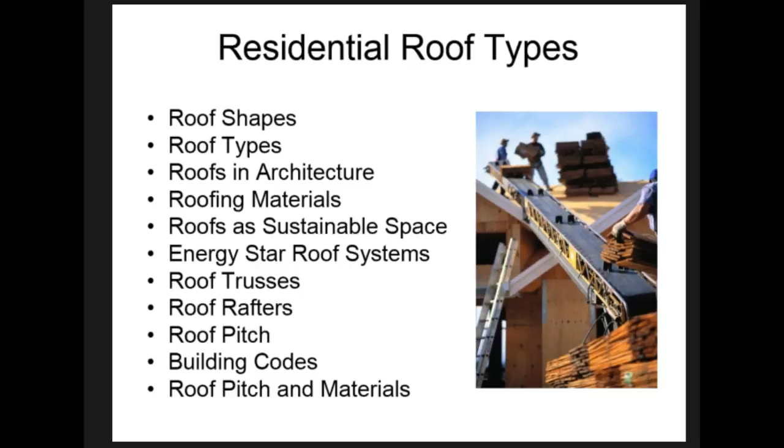We have different shapes of roofs, but basically the roofs do what you know roofs do. They protect you from the elements, and then we make them interesting so that they add visual appeal. When we look at the different shapes, when you have a real steep roof, that's usually in areas where there's a lot of snow because we want the snow to roll off of it. Flatter roofs are usually found in areas that don't have as much snow, and we want to make sure that we do have enough slope on roofs so that the snow or even the rain does come off and doesn't puddle and cause sagging in our roofs.

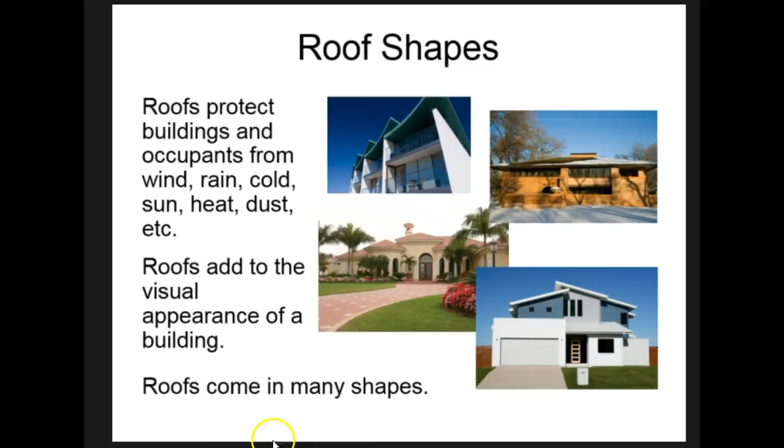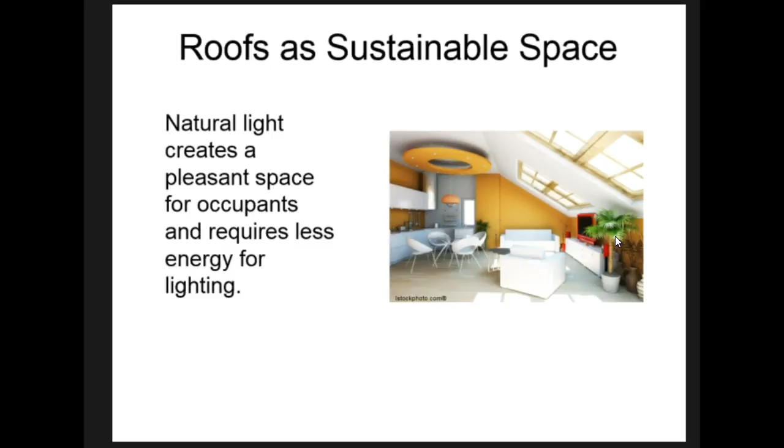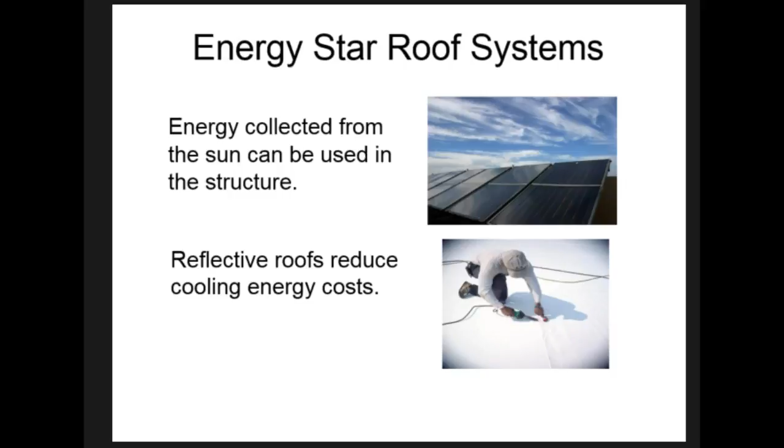Energy Star roof systems. We will talk a lot this year about Energy Star and saving energy and reducing energy cost. It's a very big concern for the world and civil engineers in particular. On our last video about the framing system, we talked about trusses. This is what a roof truss would look like from the side, and that's what it looks like when it's being built.

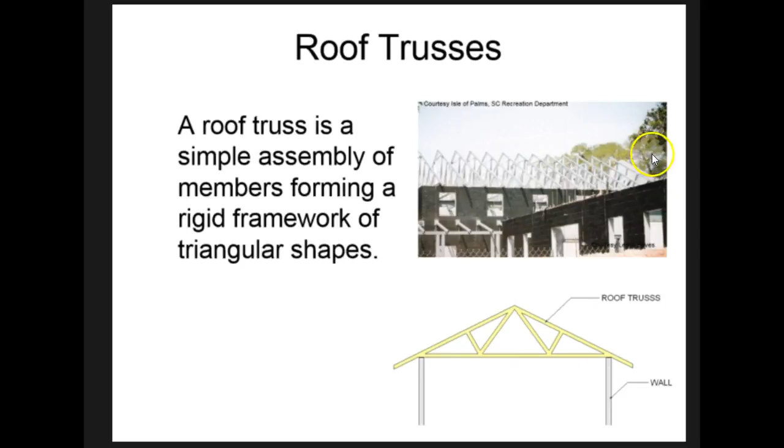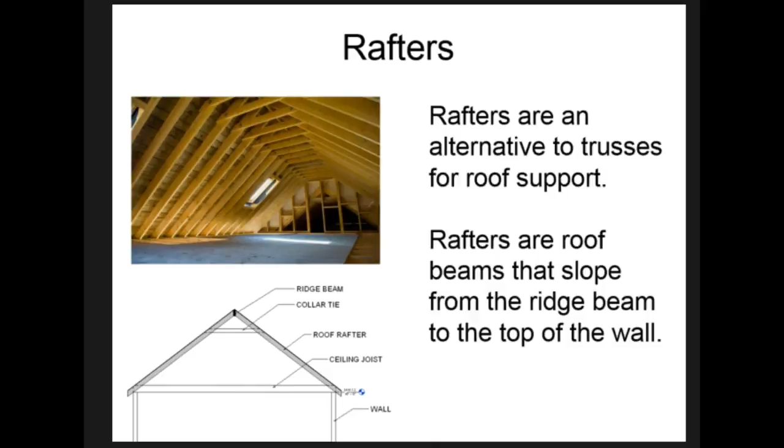This part right here is called a rafter. It's like the stud in the wall, but a rafter is what's going up here. Here's the inside of a house where you can see the rafters. We always talk about a roof being a slope, and we're putting that slope on our house in Revit as well. And it's rise over run, just like you're used to in math.

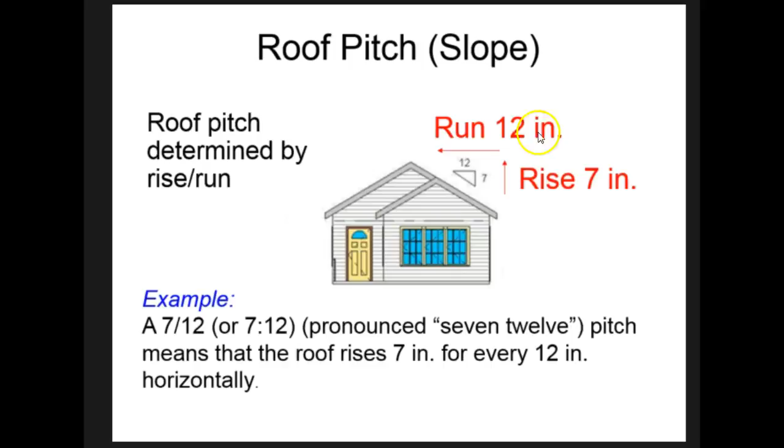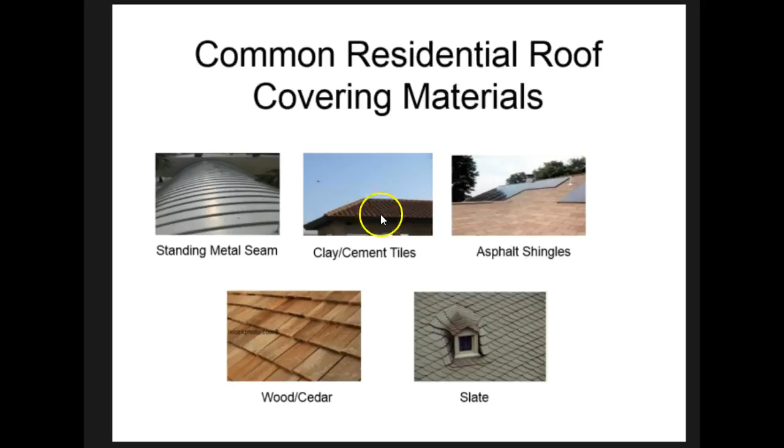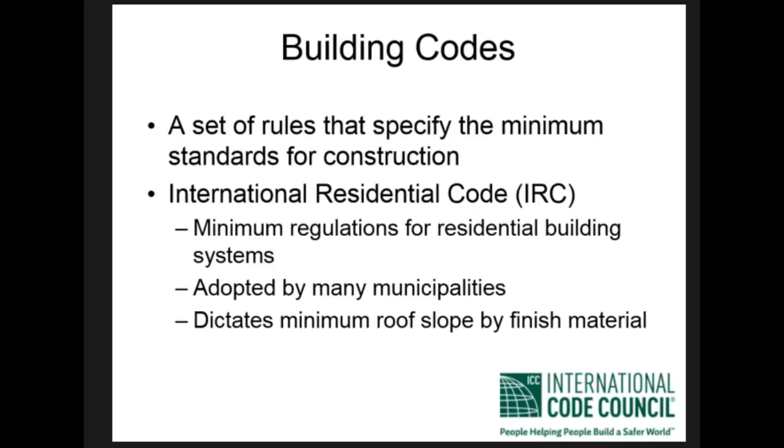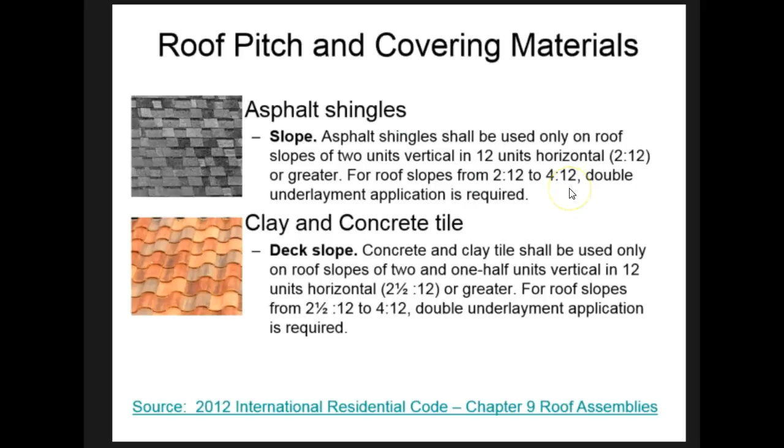Building codes. We're going to talk a lot this year about international building codes, and that does tell us what kind of shingles and roofs we can put on homes. And here's a little information about the various kinds of shingles. Basically asphalt, it tells us in our building codes, here's our little link to it. Our building codes tell us for the kind of roofing material we're going to use, what the slope has to be. Clay or concrete, its slopes. Slate, wood, or metal, and the requirements for each of those kinds.

Alright, once you've gotten your notes on the different roof types down, you're going to come and get the activity from Ms. Simpson and complete it.